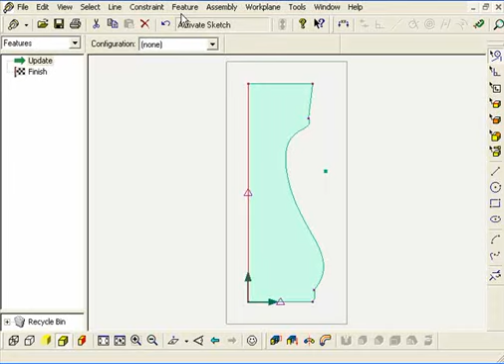Using the Select Line tool, select the central line and use the feature Revolve Profile to revolve it 360 degrees.

Then, using the Select Face tool, select the top face and make a new sketch. Click on View on the Work Plane tool so it turns towards you.

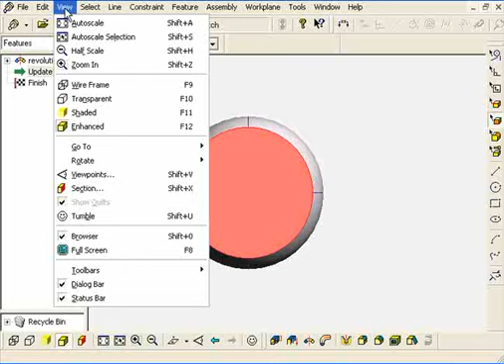Then, using the Circle tool, draw a circle in the center on the top of the chess piece. Now click on Feature, Extrude Profile.

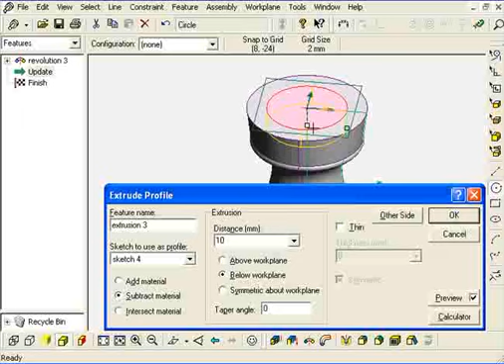Check the Subtract Material and Below Work Plane options, and enter a small value. Of course, you can control it manually by clicking and dragging on the drag handles.

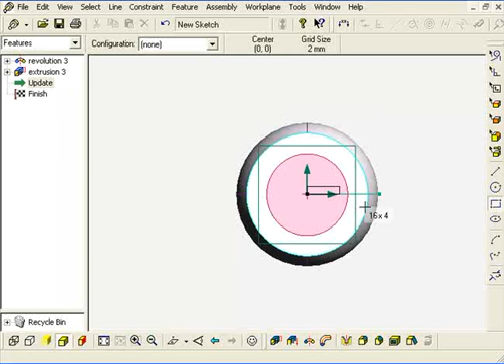Then make another sketch on the same work plane. This time you will cut out a small square on the side of the chess piece.

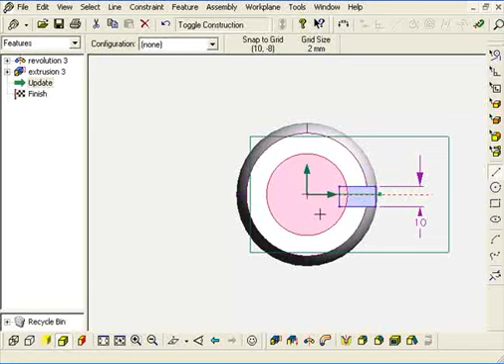Use the dimension tools to make sure it is central. You can do this by using guidelines coming from the center of the circle, then dimension it to the edges of the square. For example, here we know that the distance from the center to the edge should be 5.

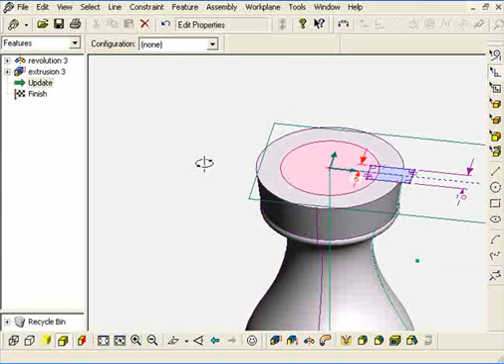Now again, extrude this. Subtract material below the work plane and to a similar extrusion depth.

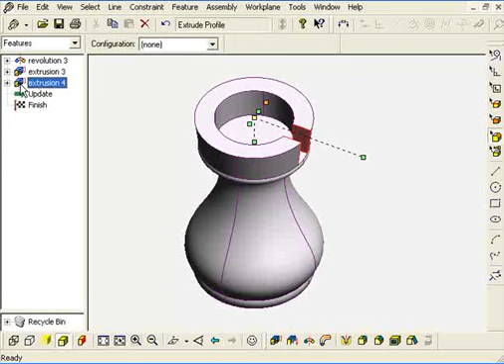Now we will use the pattern tool to repeat this extrusion around the edge of the chess piece. In the Features drop down menu on the left hand side, right click on the extrusion you have just made and select Pattern.

Then, using the Edge tool, select the edge of the circle. You will see a small arrow appearing, and you will notice in the Pattern Feature dialog box it is asking you to produce a circular pattern.

Enter the number of times you want the extrusion to be repeated around the circle, for example 6, and enter the angle between each extrusion.

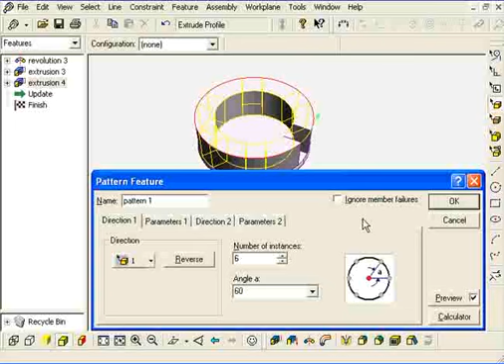You should see a yellow preview appear on your screen. If it is what you want, click OK, and you will see that we now have something similar to a rook.

Of course, at any time, if we want to alter our design, we can simply go back and manipulate it further. For example, here I feel the extrusion is too deep, so I will open up the group which is made when you make a pattern, right click on the extrusion and redefine it.

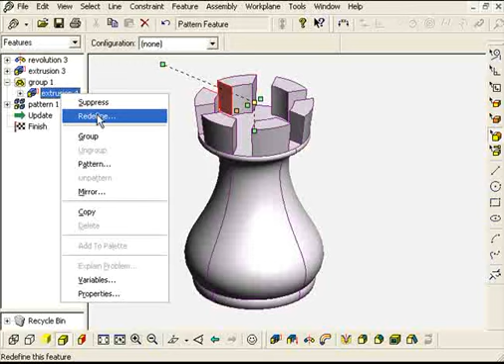Change the value, click OK and press the green update button.

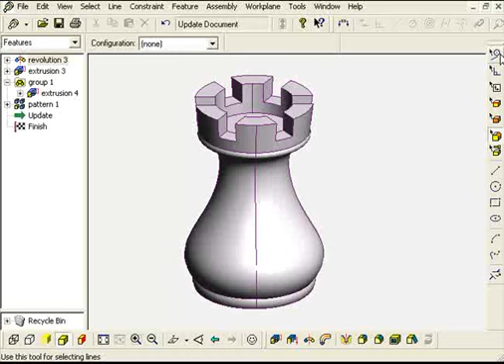We can also go back and edit the original sketch at this stage. Select the Line tool and locating your original sketch, double click on it. This selects the original sketch. Click on the View on the Work Plane tool so you can see it straight on.

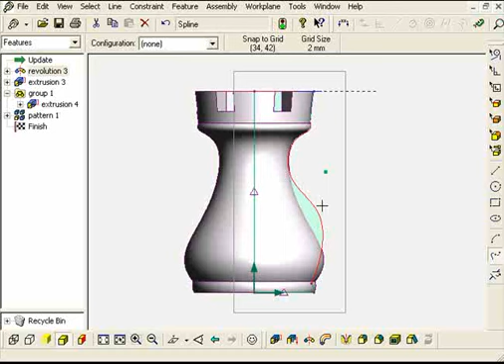We can now use the Spline tool to manipulate the original sketch we had. Simply press the green update button and it will change to the required shape.

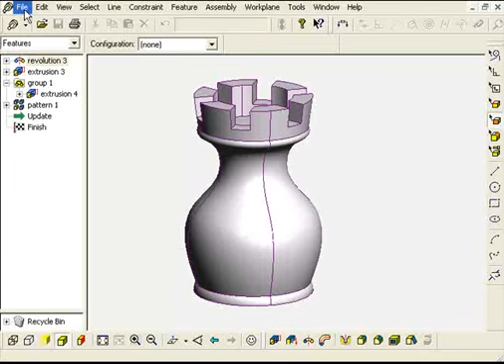When you have designed enough chess pieces, you can start to assemble it into one design. Make sure you have saved each piece separately. Then go to File, New, and open a blank new design.

Then, using the Assembly drop down menu, go to add component and choose the different components you have made.

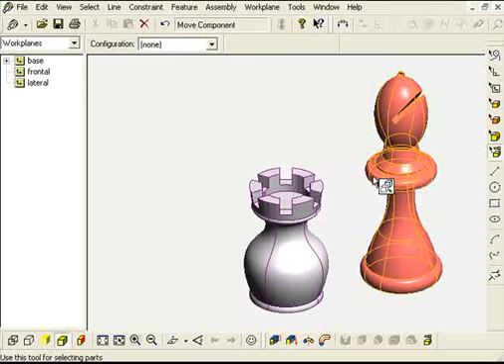Using the component tool, you can select each component and move it into position. You can also duplicate each component more than once by simply right clicking and going to duplicate.

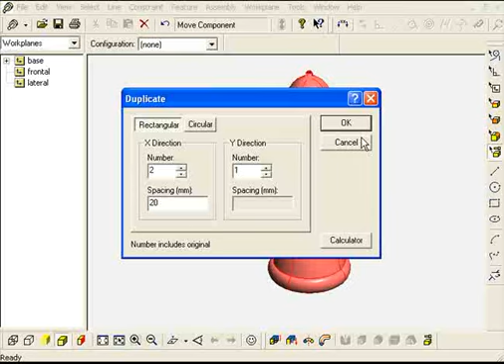Give it a set number and a spacing apart. Click on the component tool and you can click and drag to separate each component.

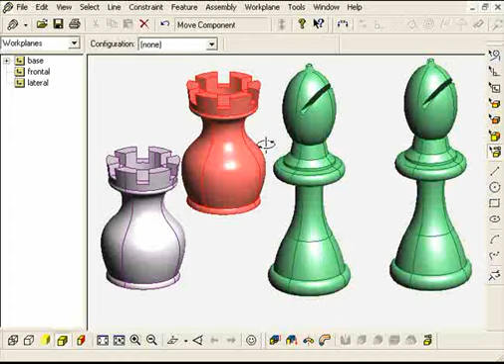At this point, it may be useful to make yourself a board so that you can mate each component to the board.

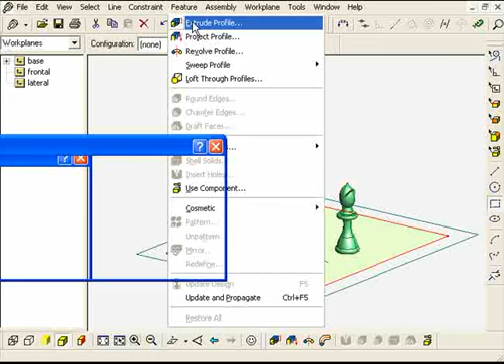Simple rectangular shape on the base work plane as shown. Extrude it and click OK.

Now, using the face tool, you can select the bottom face of each component. Hold down the shift key, select the top face of the board and go to Assembly, Mate. You can do the same with the other components.

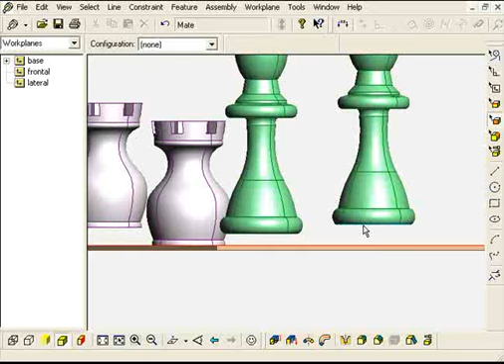Always remember to hold down the shift key to select more than one object or face at the same time.

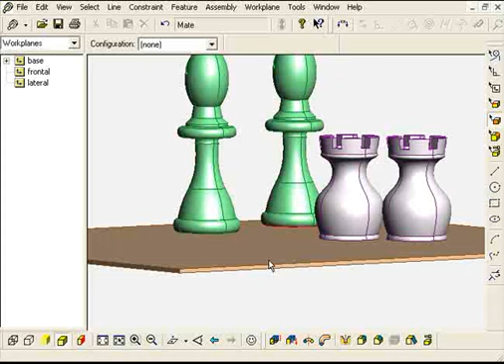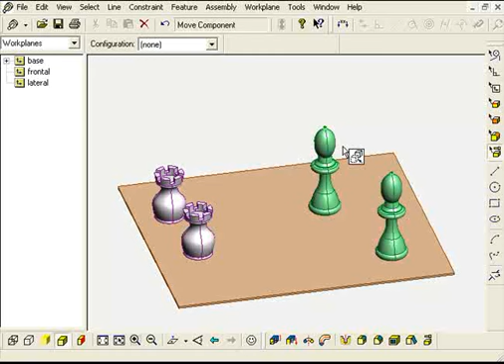Click on View, Auto Scale, so you can see the different components. Obviously, you could make an entire chess set. Move them into the positions you want.

Once you have assembled all the components you want on the board, we can now add colour and texture to them. Go to File, New, and Photo Album.

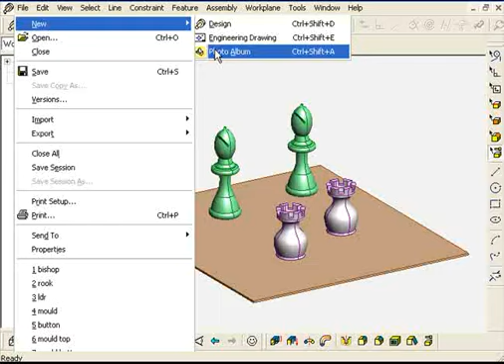Once the new screen has opened, you have to click on Image and New Image. You then select the design where you have assembled all your components, and it should appear. Click on the drop down menu on the left hand side and you can add different colours and textures.

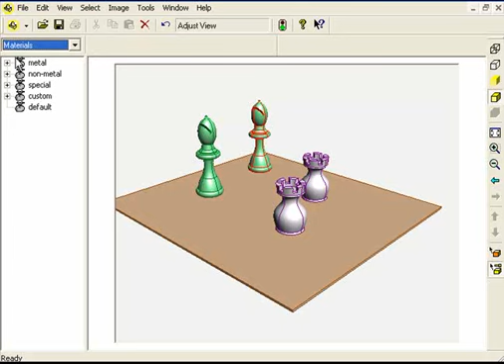For example, click and drag on the gold polish to one of the components, silver or stainless steel on another, then press the update button.

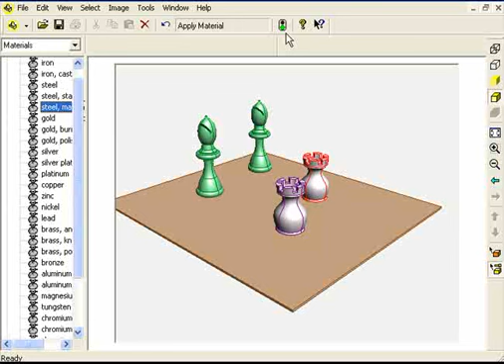You can improve the quality you have by simply clicking on Image, going to Image Properties, clicking on Presentation. In the Studio tab, you can change the lighting conditions and you can also change the background or foreground.

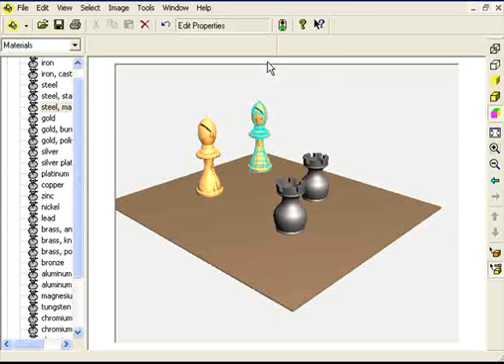Again, update it, and you will see that it casts shadows and creates a much better image.

You can also zoom in, select a different view, and press the update button again.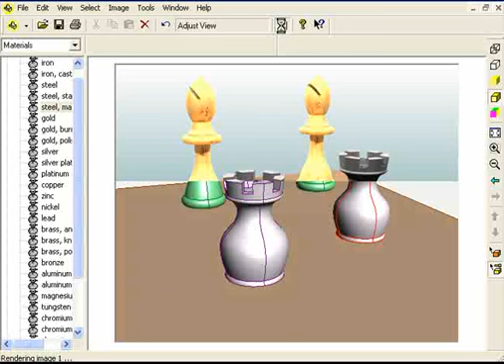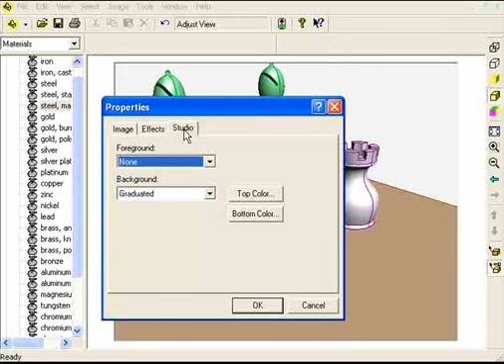Continue to experiment by adding different textures and changing the position. You can also go back into the image properties dialog box and change the type of lens.

So change it to wide angle, click OK, and you will see that you get a slightly different perspective on your image.

Again, zoom in and drag it a bit closer.

This time I will try adding some glass. Click and drag on the glass across to the rook, right click on it, and you can actually set the colour of the glass.

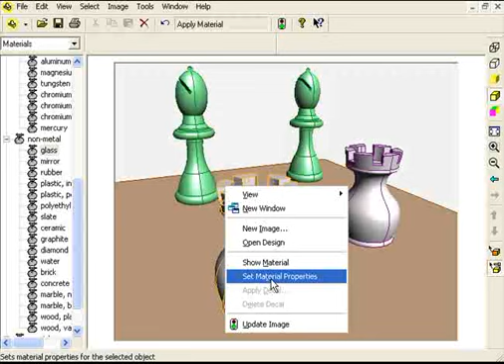So we will set it to a pale blue. We will also try to add a checkerboard pattern to the actual board.

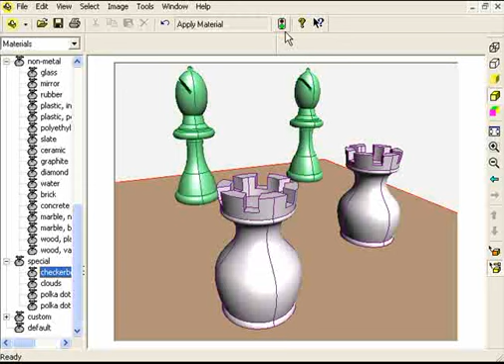And then click on the update button. You will see that you can begin to get some very interesting effects.

When you click and drag the checkerboard pattern across, you can right click and set material properties. You can actually set the colour for your checkerboard, so we will keep it to a traditional black and white board.

Click on texture and you can enlarge the scale of the squares. Again, update it.

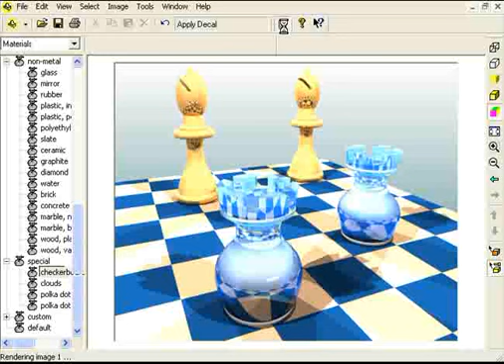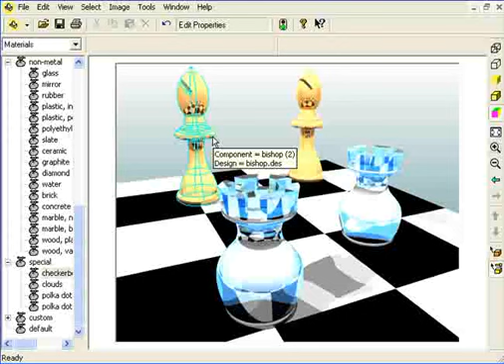We could now export this image as a JPEG, so we could insert it into another piece of software, perhaps Adobe Photoshop or Microsoft Word. Before that, we should show you how to improve the quality of your final JPEG image.

If you click on Image Properties, you will see in the image size that you can actually change the size of the pixels. This obviously means the more pixels you have in your image, the better the final quality or printout would be.

So if I change the value of the width to 2000 and the height to 1600 to keep the proportions correct, and click OK, you will see that the image disappears.

You have to again update it as the green button appears at the top of the screen. This may take some time because obviously your image is a lot bigger now.

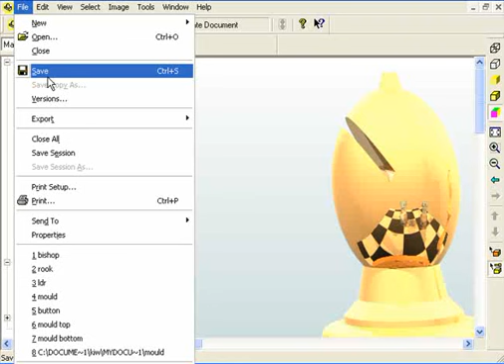Once the image has finally rendered, you can now export it by going to File, Export JPEG. You can also export as a bitmap and TIFF, but these will have a large memory size depending on how much spare space you have in your hard drive.

Export as a JPEG. Make sure you click on browse so you save it somewhere you know where it is, and give it a name. Save it.

By changing the quality factor scale, you can minimize the amount of space your JPEG will take up, but you will also lose some of the quality. Keep it at 80% if you want a good quality image, or higher. Then click OK and you will have saved your JPEG.

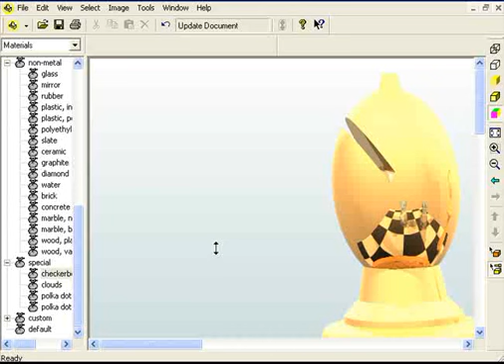As mentioned before, we can now take that JPEG and insert it into another piece of software, for example Microsoft Word, by simply Insert Picture from File.

If we locate the same place where we saved it and simply insert it, this would obviously be very suitable for creating an artist's impression of work in a GCSE or A-level folder.